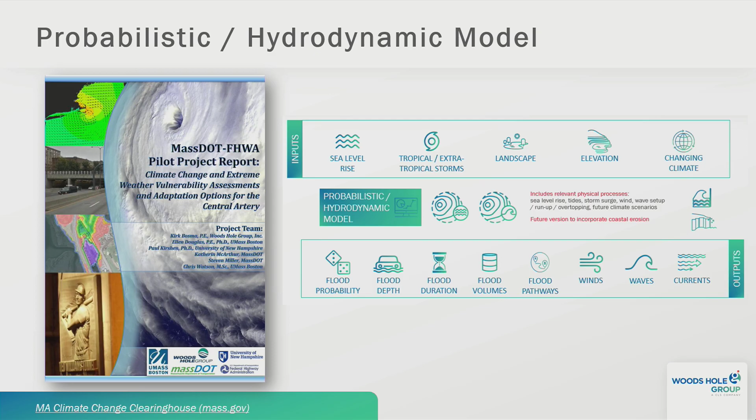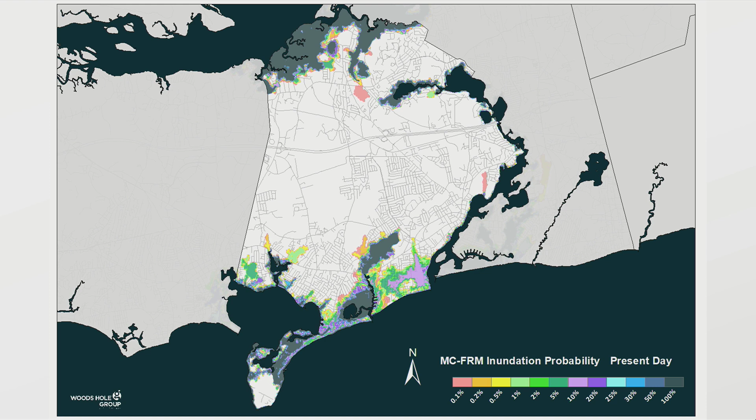One thing to notice also in this map is this pink extent. The pink is the 0.1% extent, which we commonly refer to as the 1,000-year storm. So once every 1,000 years, we might experience that type of storm that will flood the extent of those inland areas. There are results for 2030, 2050, and 2070.

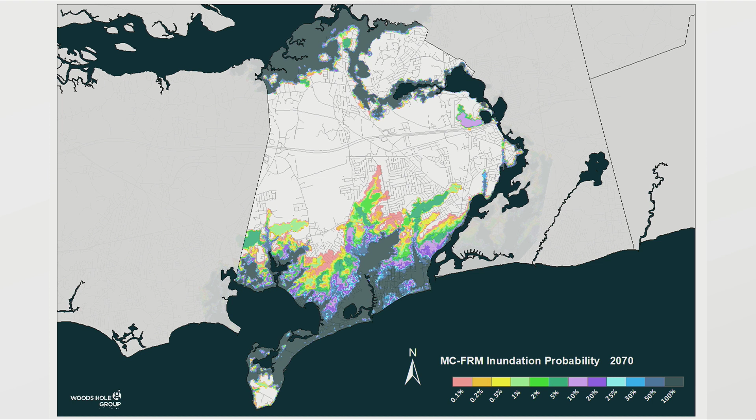When we were considering what we were going to assess in this project, we wanted to make sure that we captured municipal assets that fell in the extent of the worst case scenario. So the extent of the 2070 0.1%, again that pink color, is the furthest inland extent that flooding is projected to occur, which is what we use to determine the critical facilities and town-owned infrastructure that would be assessed in this project.

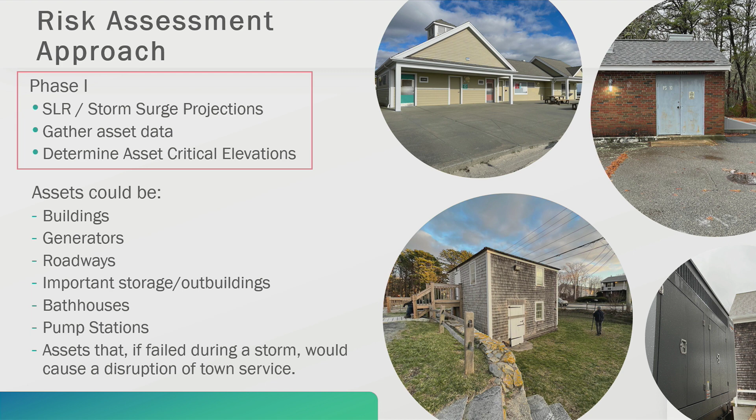Once we understood how we were assessing infrastructure, we then gathered that asset data. We collected information on buildings, generators, roadways, important storage and outbuildings, bathhouses, pump stations, and other assets that, if failed during a storm, would cause a disruption of town service. The importance here is we wanted to concentrate our efforts on assessing infrastructure that is owned and managed by the town, but provides town services important to the people that live here.

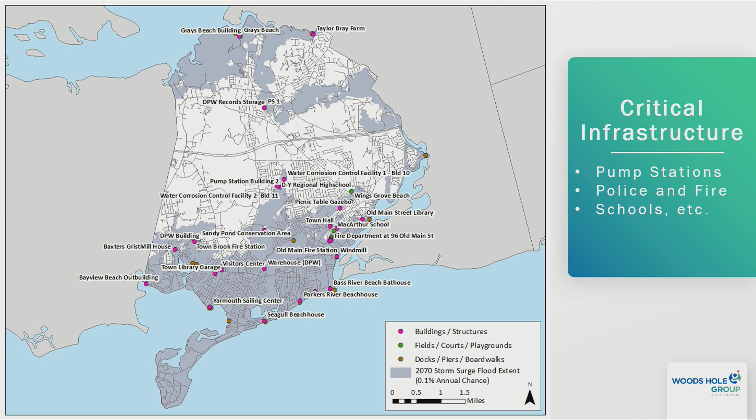So based on the available GIS data and the use of that 2070 0.1% extent, this map shows the location and variety of assets that we analyzed during the project. After this inventory, overall we assessed 173 assets.

The next phase of this project is phase 2, and this is where we really get into the nitty-gritty of understanding the true vulnerabilities and risks to those infrastructure assets.

The first step is the inundation mapping. So all of the assets that we inventoried, we had to use those graphics, those maps with the color coding, to assign the annual exceedance probability to each of those infrastructure assets. That's what we call the probability of inundation for each asset.

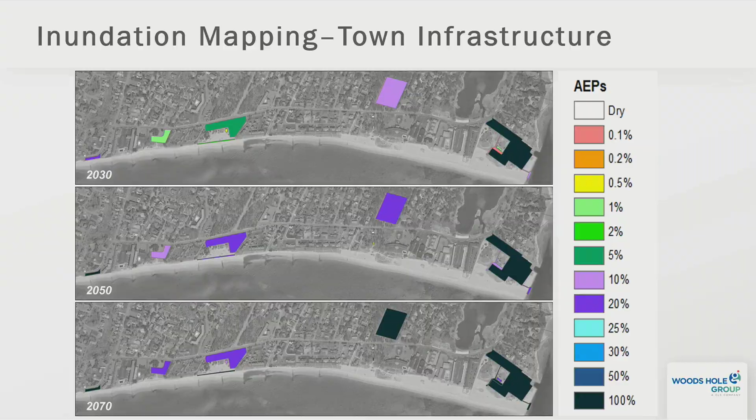Once we understood the inundation mapping for each of the assets, we then go through a consequence scoring, or criticality, framework. This is really important, and it was important for town staff to have their buy-in. The criticality or consequence scoring framework is a tool for important discussion, consensus building, and decision making.

Each asset is evaluated using several key categories and different scales, which ultimately influence the priority assigned to investments of time and money. Working with staff one-on-one, we took all of the asset inventory and all the individual assets and scored them based on this matrix.

So we considered categories like area of service loss: does it impact just the building, or does it impact services to the entire town? We also considered duration of service loss, cost of damage, and impact to public safety and health, and how it could affect the economic activity of the town.

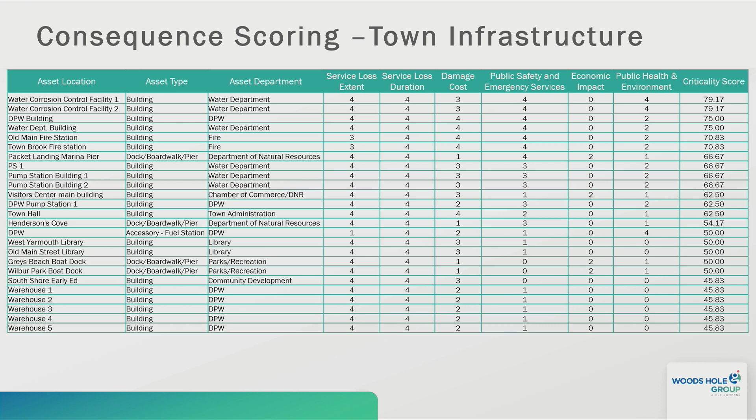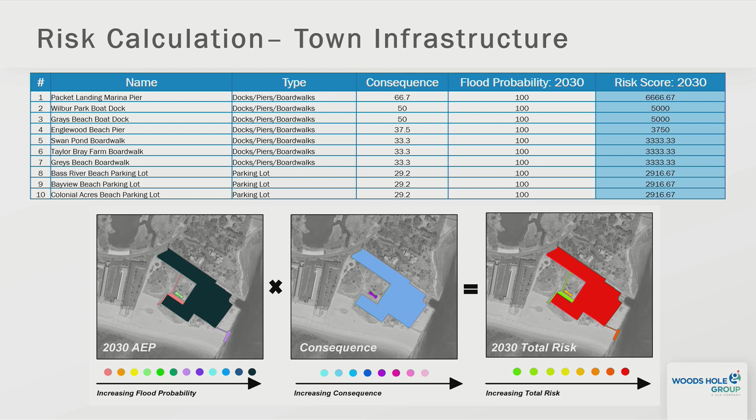That then takes us to phase 3. Once we have that listing of all the total risk scores, we can prioritize those high-risk assets, which helps inform our adaptation and resiliency plans. The results of our work, when ranked starting in the 2030 time horizon, show what's most priority.

By no surprise, in the town of Yarmouth, the most vulnerable assets we've identified are part of the docks, piers, and boardwalks often found along our coastline, which includes Packet Landing Marina, Wilbur Park Boat Dock, Grays Beach Boat Dock, and the piers and boardwalks. We should not be surprised by that, since they're all located along the coastline and are dependent on water for their use.

If we take those out of the ranking and focus on just buildings, the top 5 vulnerable buildings are Englewood Beach and the Yarmouth Sailing Center, Taylor Bray Farm and its associated buildings, Bass River Beach and the bathhouse, and other beach buildings and bathhouses.

The key takeaway here is that the highest risk assets include water-dependent and coastal infrastructure. But the good news is that in the near term, most municipal buildings providing town services we all depend on are relatively safe. The town could pursue flexible long-term resiliency strategies if desired.

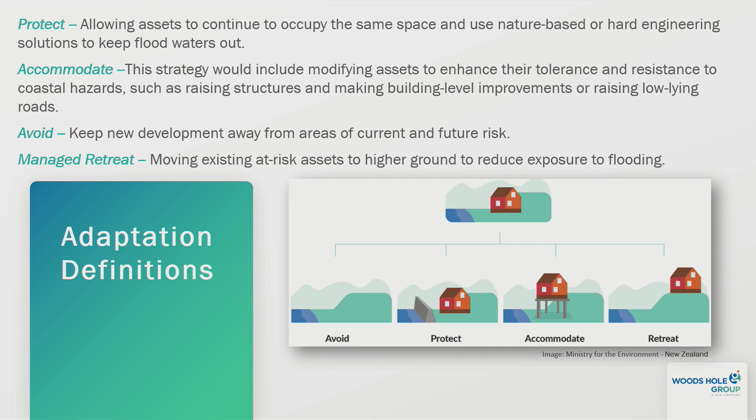I do want to go through a couple examples. An example of a landscape scale adaptation meant to protect more inland areas: we could consider nature-based and/or hard engineering strategies to reduce flooding in inland areas.

I provided a few graphics here to make this point. You could use earthen berms, like in this example, to elevate the coastal land and protect a low-lying roadway or other assets behind it. You could also enhance natural dune and beach systems to provide protection of assets and establish native habitat.

Another example of more hard engineering strategies is using flood walls or bulkheads. Again, these strategies are really aimed at protecting current existing infrastructure.

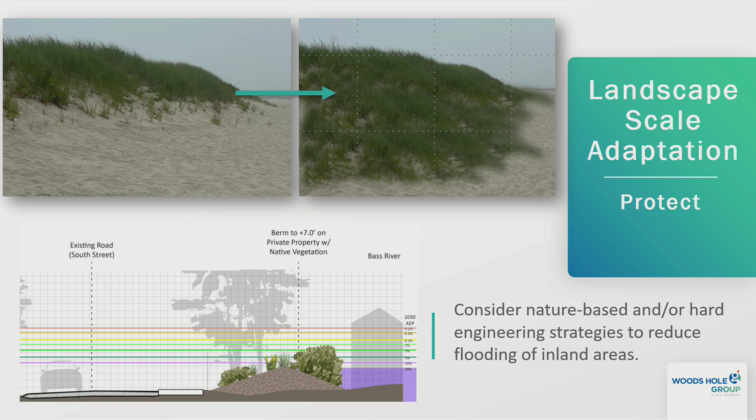The next example is a building-specific adaptation, really aimed at accommodation. This is trying to keep the infrastructure, the building, or the asset in the place that it's found, but providing some protection to prevent floodwaters from getting in. So you're accommodating the asset by preventing floodwaters from entering the area. This technique allows for the asset or building to remain in its own location, but still prevent flood inundation.

We would consider exploring the use of deployable barriers as an example of this option.

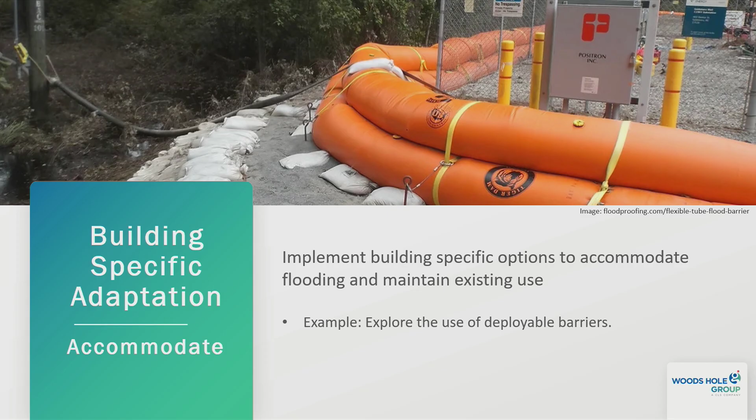With those examples, I'm going to now talk about specific adaptations that we are likely to recommend in the adaptation plan within the final report. I want to reiterate that the recommendations I'll explain in this section are still preliminary, but I hope these ideas and options will indicate some of the opportunities the town has to increase town-wide resiliency. More detail and solidification of these options will be documented in the final report.

The first example is the Sailing Center. This is a facility along Englewood Beach that serves recreational purposes in the summer and is extremely vulnerable in the town to sea level rise and climate change.

We would make some general building recommendations, including elevating the building if possible. There are examples of raising buildings on pilings in order to remove the first floor elevation out of the area of possible flood inundation. Many houses and buildings can be elevated on pilings with added flow-through structures to accommodate and maintain the location of those buildings.

We could also, if a building has a basement, consider elevating the interior first floor and filling in the basement—basically backfilling it—which would remove the ability for water to enter that space.

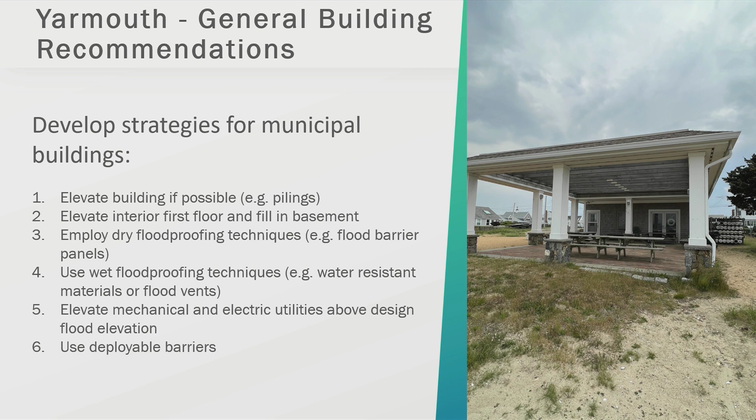We also provided recommendations on some other asset groups, focusing on piers, docks, and boardwalks. An easy option here, especially along our docks and piling systems, is to increase the height of those pilings or reconfigure them so you can increase the height through time. Packet Landing is a great example of this. I can't remember how long ago, but they had the instinctual knowledge to raise the elevation of those pilings. They have really short ones along the dock system, and then they installed higher pilings to prevent those docks from going over the shorter pilings. So that's a great option.

We also recommend possibly relocating waterfront utilities to higher ground. If you have electrical boxes or other utilities, you can move them further inland. And elevate mechanicals—a lot of the boat docks have winches and pump out stations, so finding a way to elevate those mechanisms or find them safer locations more inland.

For beaches and coastal buildings, again, a lot of these are along the coastline, but there are ways you can increase their resiliency to flooding. Some of those include reconfiguring the existing beach layouts. Are you able to shift the layout of a beach to accommodate adaptation strategies, whether it's beach dune enhancement or moving the beach house further inland, and things like that.

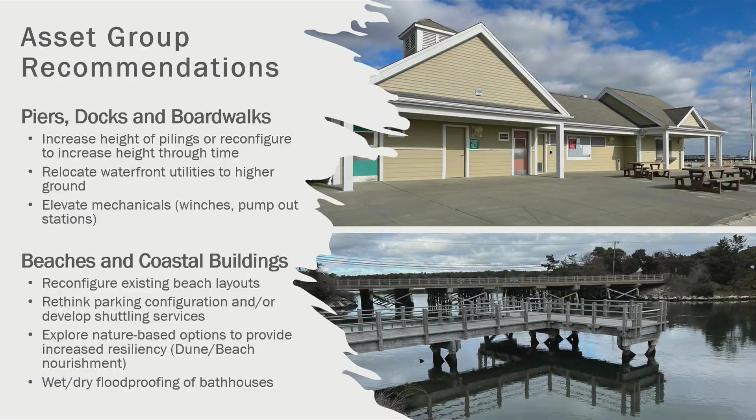As I mentioned, we could always explore nature-based options to provide increased resiliency. An example would be those dune beach enhancement projects to bolster shoreline protection and maintain and provide natural habitat. And along the actual bathhouses at each of these locations, consider wet/dry flood proofing of those bathhouses.

Another option was changes to existing policy and reviewing regulatory recommendations. At the local level, municipalities can reduce the impacts of coastal hazards through land use policies and development regulations. This can ensure that development can withstand present-day coastal hazards, but also the hazards expected during the useful lifetime of the infrastructure. We can also help by reviewing existing zoning bylaws, building codes, local wetlands bylaws, and other policy frameworks.

I do want to draw your attention to one piece that has been completed recently. Cape Cod Commission released back in 2021 their Cape Cod Commission Model Coastal Resilience Bylaw. Working with Woods Hole Group, the Cape Cod Commission provided a way for communities to integrate new information into existing wetland bylaws. So those are some other strategies we're recommending in the final report.

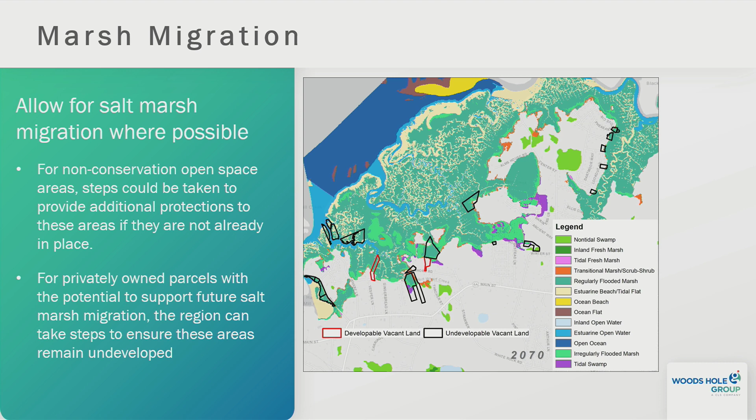I just want to bring our attention to some of the town-wide projects that the town could continue working on to further increase resiliency efforts.

Really, the town could review and update the hazard mitigation plan and incorporate the most up-to-date climate projections as necessary. Every town, if they choose, can periodically update their hazard mitigation planning, and that might be a great opportunity to incorporate these recommendations and further assess up-to-date climate projections.

We recommend considering completing neighborhood-specific vulnerability assessments, inclusive of residents and business community stakeholders. A challenge for these state-funded projects is that the town is using funds as a match, so these are considered town projects, and it's sometimes challenging to engage and include residents and other stakeholders. So there is a possibility to do some more smaller scale assessments where we can strategically engage those stakeholders.

We also recommend utilizing the results of the Cape Cod Commission's low-lying roadway project to investigate emergency egress planning for the most vulnerable roadways. Cape Cod Commission is on year 2 of a Cape-wide project where they're using the same framework that I described in this project to assess all of the low-lying roads across the Cape. Those results are coming out, and towns are encouraged to utilize those results to move forward in future adaptation planning.

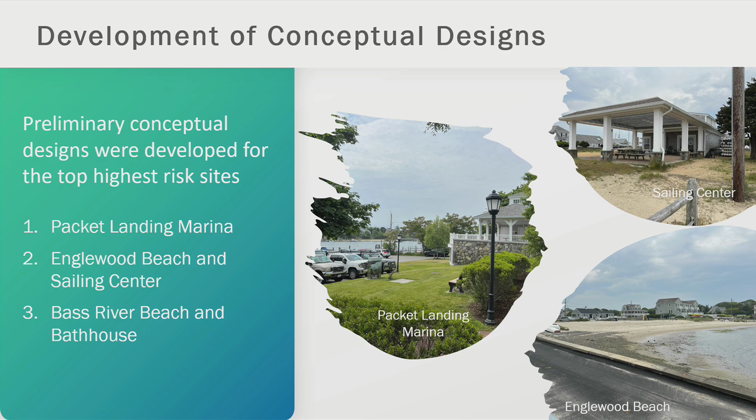For this project, the top 3 sites that we're developing concepts for are Packet Landing Marina, Englewood Beach and the Sailing Center, and Bass River Beach and the Bathhouse. I am going to focus on just one of these, but the conceptual designs for all 3 of these locations will be available in the final report and are here printed in person in the room.

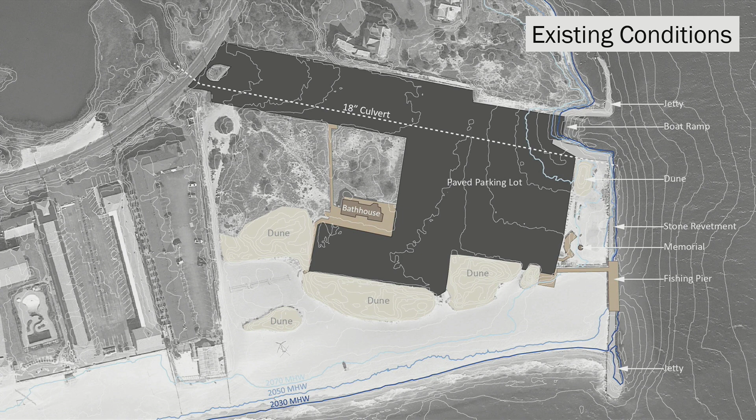Again, as I said, the concepts for the other two priority sites will be available during the in-person workshop.

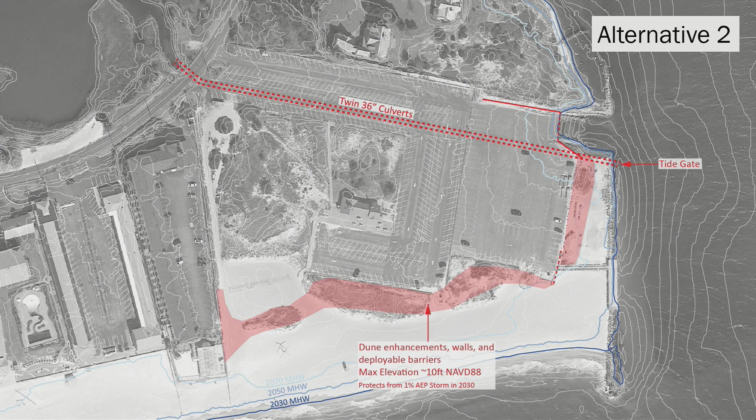I just wanted to quickly go over where we are in this project. We've been working on this since last September, October, and we are in the final stretch. Everything I've spoken to about tonight will make its way into the final report, which will culminate to the project deadline on Friday, June 30th. We could have a rough draft and submit a final report in early July.

The next steps are, again as I mentioned, completing that final report. We will be doing a Board of Selectmen meeting on July 18th, which will be a short overview of this information. We're also hoping to engage the Chamber of Commerce one last time to present the results of this work and have an open discussion.